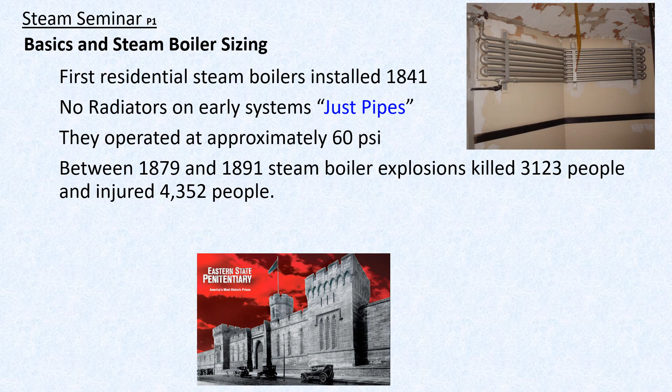They operated approximately 60 psi. Now today that's a lot different, but back then the steam pressure was running about 60 psi, which is dangerous, as we all know. Between 1879 and 1891, steam boiler explosions killed 3,123 people and injured 4,352 people. So combine these together, in that time period, there were 7,475 people injured or killed that was actually reported. There was probably some that weren't reported.

In 1880, they adopted the 2 psi rule residentially, which still stands today on residential applications. You use 2 psi back then or you don't get paid. So they were pretty straightforward with this whole idea of going to 2 psi and saving lives.

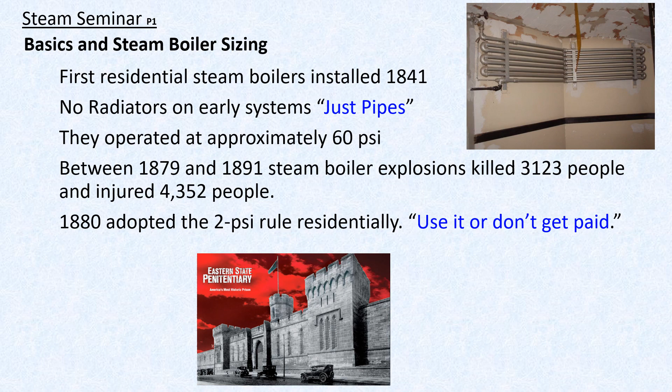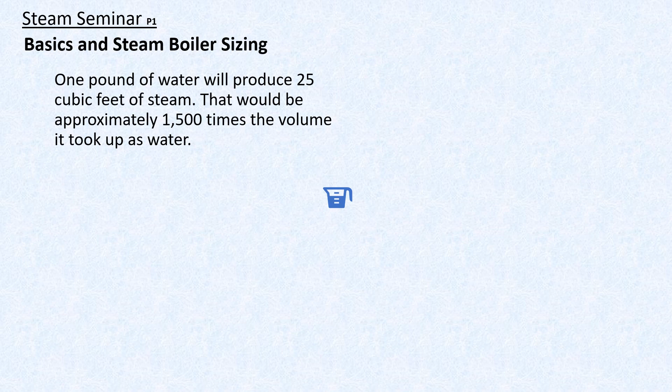So if we look at steam itself, it's being produced in the boiler, and 1 pound of water will produce 25 cubic feet of steam. So that's approximately 1,500 times as it expands out into steam into a vapor. So let's assume that we have 1 cup of water. We would actually end up with about 1,500 cups of steam. So it doesn't take a lot of water in the boiler to heat a building with steam. And steam actually, you'll see, moves very rapidly.

Talk about steam pressure. Residentially, you don't require a lot of steam pressure. Some companies operate in ounces of pressure, some operate in pounds of pressure. Almost any, and I say almost because there's a lot of variations of steam systems, but the majority of the steam systems, we could operate in ounces and it would still work good. I always say the best steam system is one that never builds pressure, but it'll still heat the building. The biggest enemy of steam pressures and steam systems is the pressure itself. The higher we raise that pressure, the more problems we're going to encounter. And we'll take a look at those a little bit later in the seminar.

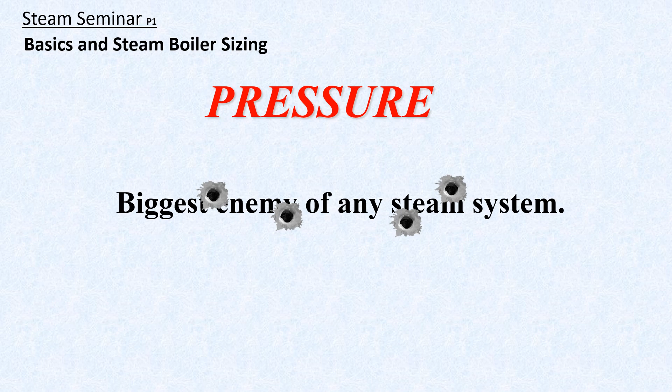I can't talk about heating a building with steam heat without talking about latent heat. That's the heat required to convert a liquid to a vapor. It's not going to change the temperature. We're going to take 212 degree water and produce 212 degree steam. We have to add another 970 BTUs per pound of water to accomplish this, making that transaction from liquid to vapor. This sounds like it could be pretty expensive because that's 5 times the energy it took to change water from 32 degrees to 212 degrees.

So let's recap that. If we have 32 degree water, not ice, but just 32 degree water, and we're going to convert it to 212, all those BTUs it takes to raise that water temperature from 32 to 212, it's 5 times that much to convert it to a vapor. Now, we're not raising the water temperature from 32 to 212 in the system, so it's a little misleading there. That's just a comparison. We're taking that water at room temperature on the first cycle or two and raising it to 212. But then as the boiler cycles off, that water coming back is about 180. So then we're going to convert it from that point to 212. So we're changing that 5 times number.

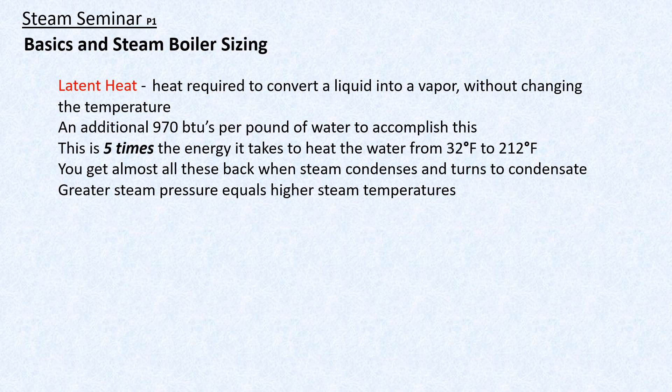Once we hit that 212 water, we're converting it by adding the 970, but then the 970 is coming back out in the system, so we're not really losing a lot at that point. Greater steam pressure equals higher steam temperatures to a point, but you'd have to add a lot of pressure to make a difference. We're not changing the latent heat part, we're only changing the amount of pressure in the system. We're compressing the steam more to raise the pressure. Steam's not heating the radiation, the latent heat is. So adding all this steam pressure doesn't do anything more than cost a whole lot of money.

The rate of steam pressure change is exponential. If you're creating steam at 1 pound of pressure and then change it to 2 pounds, that's an exponential growth compared to going from 0 to 1 pound. And if you go from 2 pounds to 3 pounds, that's another exponential growth. It's not an equal growth just going pound to pound to pound. Many steam systems have way too much steam pressure on them, and that could be 3 or 4 pounds of system pressure. We should really think about heating at lower pressures, maybe even ounces of pressure instead of pounds. That would be beneficial.

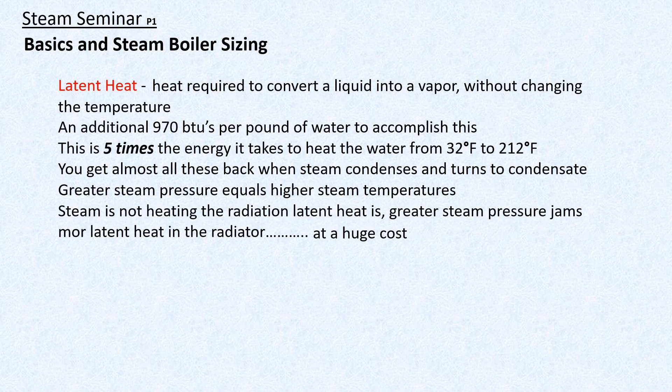Latent heat is what heats the building.

Let's talk about air removal. We have to get the air out of the system to allow steam to rise, and probably one of the more overlooked items on a steam system are the vents. I've seen many one-pipe steam systems where there's supposed to be a vent somewhere down the main line, and there's just a plug in it instead. The vent was removed, probably because it was leaking, and not replaced. That just starts running the fuel bills higher. We have to vent that air, get the steam to the end of the main as quickly as we can on a one-pipe system, and then start venting the radiation. So we want to move that steam out quickly from the boiler.

All steam systems need to vent air to move the steam faster. We can't just compress the air because it's not venting fast enough. That starts building pressure, and of course, pressure costs more money to operate at.

At zero pressure, steam moves through an insulated pipe at approximately 30 to 50 feet a second. We're saying zero pressure in the system yet, maybe a little bit in the boiler, but since it's an insulated main, it won't condense as rapidly once we get past the pickup factor of heating the pipe up. Then we move that steam quickly through the system. As we start building pressure, the steam slows down. At 5 psi, the steam would move through the pipe about 22 feet per second. That may seem odd, since at zero we're moving faster than at 5 psi, but remember, it's not an open-ended pipe—we have to compress the steam. So as we build more pressure and compress that steam, it takes longer. If it was just an open-ended pipe, it'd be hard to get to 5 psi, but it would move out the end pretty quick. This, though, is a closed system.

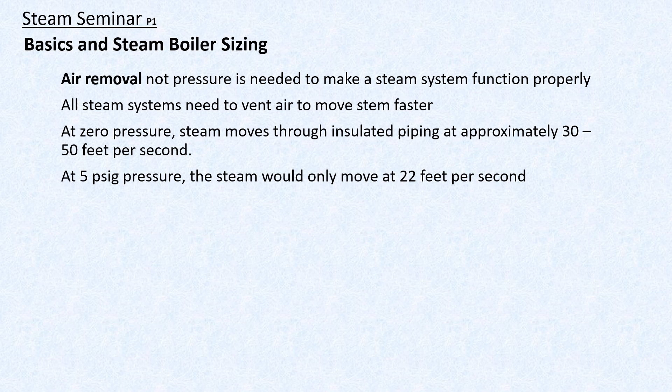Steam boilers are rated in terms of square feet of steam. It's called EDR, equivalent direct radiation—the original term for square feet of radiation.

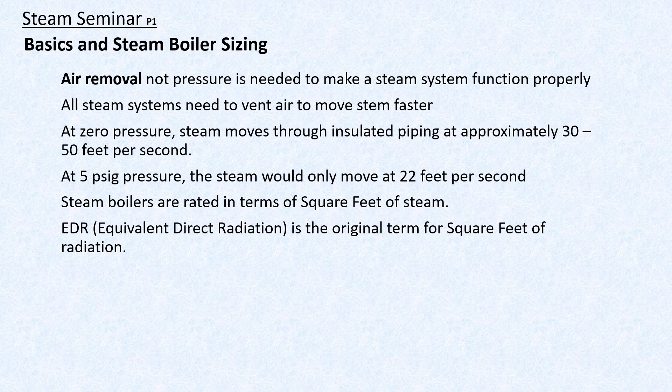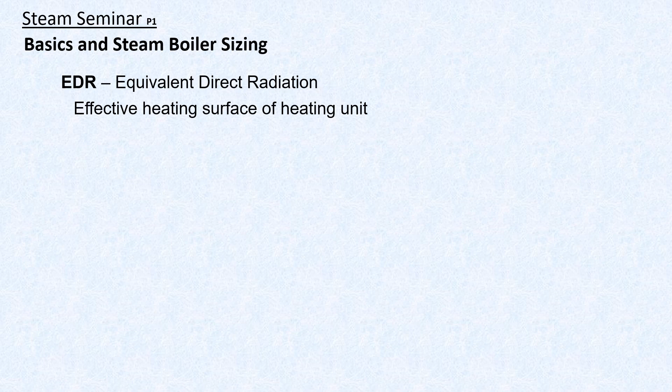Briefly mentioned EDR in the last slide, let's talk a little bit about that. That's the effective heating surface of a radiator. They go by square feet of radiation. Each square foot of radiation, or EDR, equals 240 BTUs at 1 psi.

So if you do get 1 psi, you will be getting 240 BTUs for every square foot of radiation in that structure. To convert EDR, square foot of radiation, to BTUs, you multiply that times 240. So the total number of square feet of radiation times 240 will give you the BTUs.

Now just the opposite: if you convert from BTUs to square feet of radiation, you take the BTUs and divide them by 240. That'll give you the total square foot EDR that boiler will put out.

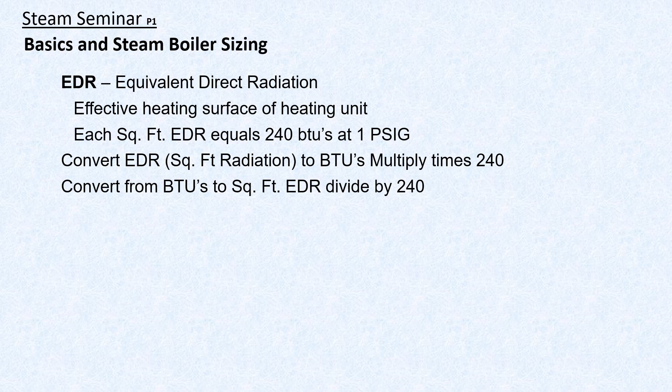High pressure goes to low pressure always. That's physics, you can't change that. Remember, the high pressure is in the boiler, and it's always going to be higher than what's in the system when the boiler is running. The longer the boiler runs and the pressure increases in the boiler, the pressure in the system will increase. It doesn't matter if it's ounces of pressure or pounds of pressure, but high pressure will always go to low pressure.

Things to consider when you're replacing a steam boiler, we're just going to highlight a couple of them here. Of course, all the steam boilers need to be resized and installed the proper size, which means you have to check the radiation count and see what's there, then size the boiler off the square feet of radiation required for the building.

Plan on replacing all the near boiler piping. It may or may not be right, but some things might have changed a little bit through time. But I would always consider repiping the near boiler piping to and from the supply pipes. It probably wouldn't be a bad idea to consider replacing maybe 10 feet of a wet return if it's there, because that last 10 feet before the boiler always seems to get fairly corroded up.

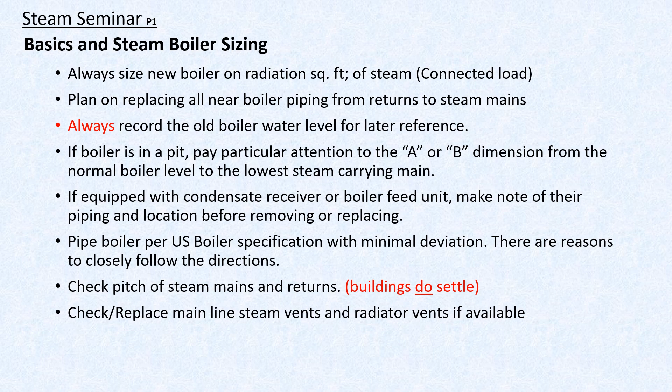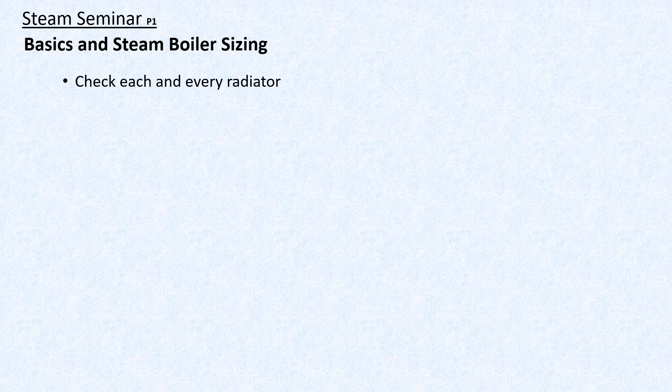So this is all kind of guidelines on replacing a new steam boiler. Let's talk about sizing the boiler. You have to check each and every radiator. What that means is you have to measure the radiator.

You got to measure the height. How tall does the radiator stand? It goes from the floor, which includes the legs - from the floor up, not from where the bottom of the radiator actually is, excluding legs. You got to go from the floor all the way to the top of the radiator. Now that'll give you your height.

The next thing you're looking for is the number of tubes or columns. Every radiator will have one or two pipes going into it. So from the pipe end, doesn't matter which end, you'll have one, two, or three columns or tubes in that radiator. So we're looking at one section - how many vertical tubes or columns are there? Then you would write that down.

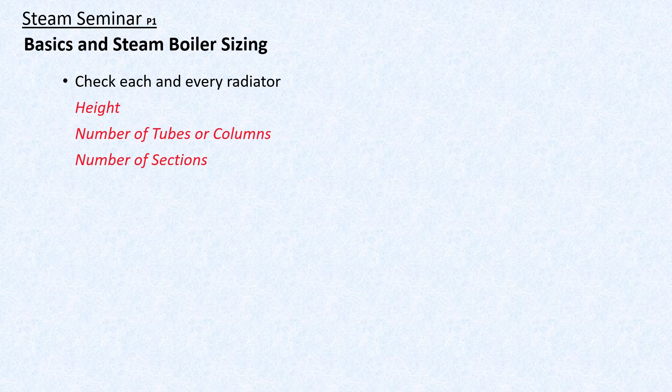And then the last thing is how many sections make up the length of the radiator. So we're going to go from all the way to the left to all the way to the right, looking face-on at the radiator - this gives you the total length. Some people like to measure the length, but the number of sections is more accurate. So if we have the height, the number of columns or tubes, and the number of sections, that's what you need to properly size a steam boiler.

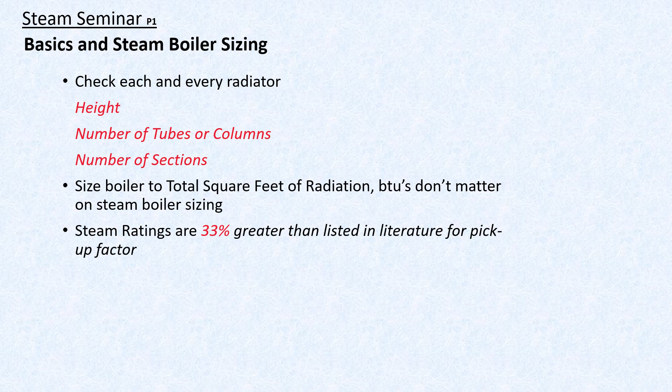Then when you convert all this to square feet of radiation, that's when you choose a boiler size. Again, BTUs don't really matter when it comes to steam. Steam ratings are 33% greater than what's listed in the literature - this is called a pickup factor. It takes so many BTUs to heat the piping, so they add extra radiation, or extra boiler BTUs, to heat up the piping. Once all the piping's hot, that converts over to usable BTUs for heating, or usable steam for heating. So there is a little bit of extra in there, and that's always good to remember.

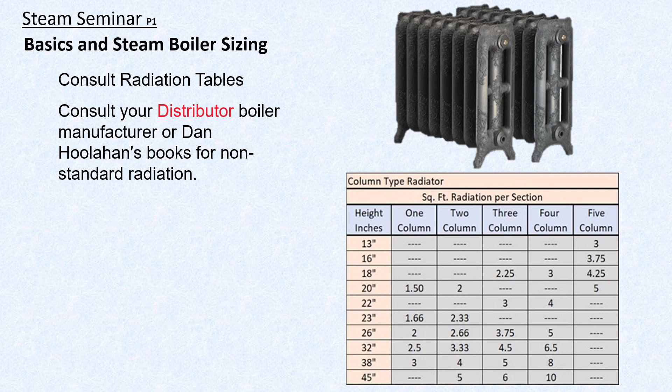So that's pretty easy to figure out. Let's look at an example.

This is a column type radiator again, same one. It's 32 inches high, 3 columns, so our multiplier would be 4.5, and that radiator is 19 sections long. So it's 4.5 times 19, which gives you 85.5 square feet of radiation.

That's one. Then you can go ahead and do all of them and just total them up, and then go to your color brochure and pick a boiler off the square foot of radiation.

Now here's a little tip that speeds things up. Let's say you have 5 radiators that are 32 inches tall. If the total number of sections for all 5 comes to 50, you would take 4.5 times 50. You don't have to do each one independently, although it's not bad to do that sometimes. But in most cases, I would just take all my radiators that are 32 inches tall, whatever they are, and count the number of sections, as long as they're the same type radiator, like a column type or tube type. So again, these are column type radiators.

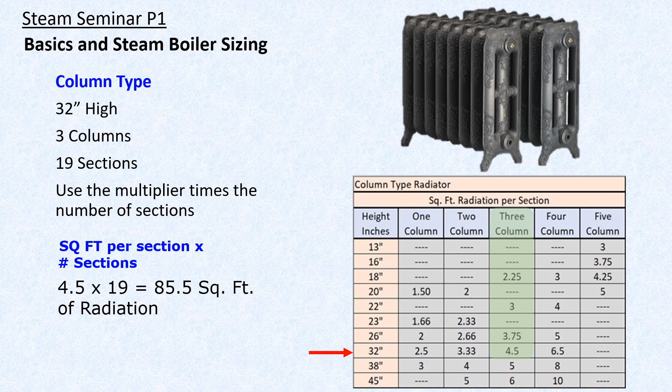Let's say we have a 3 column radiator with 10 sections, 32 inches tall. We're just going to walk through an example here if you're going to do each one. So it'd be 4.5 times 10 sections, since the chart told us 3 column, 32 inches was 4.5. 4.5 times 10 is 45 square feet.

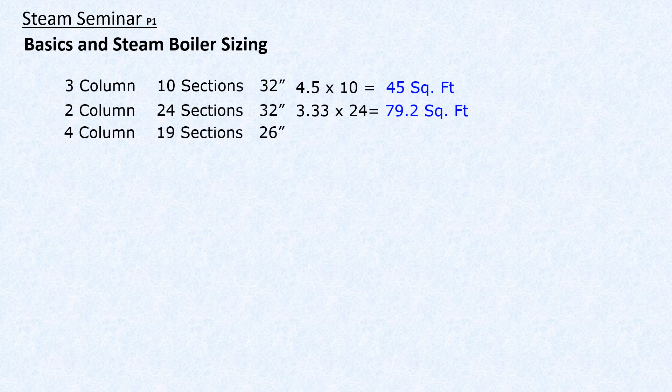The next radiator is only 2 columns, but it's 24 sections, 32 inches. Do the math, that comes out to 79.2. We'll follow that the whole way down. Let's say there's only 4 radiators in this house, kind of unusual, but it's just an example. So these 4 radiators come out to 339.2 total square feet of radiation.

So that's how we would size our boiler.

Now here's a little note. It says if mains are not insulated - that's the main around the basement where the radiation pipes come off and go up to the radiators - if that main pipe around the basement is not insulated, it becomes a radiator, and you have to measure that out and add it in. That's where some people fail, because they don't think of the piping, they just think of the radiation. The piping up to the radiators we don't really have to count, but the main pipe has to be insulated.

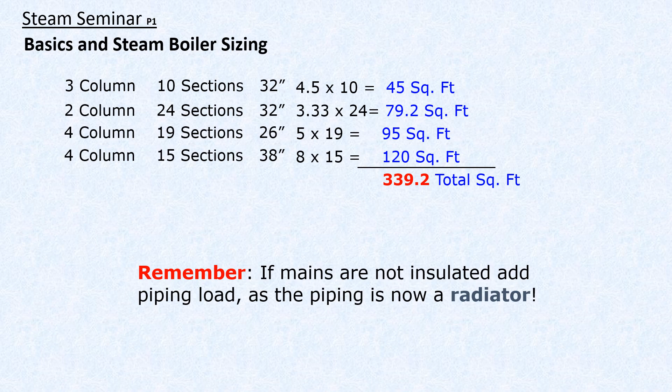And if not, it becomes a radiator. You got to count it and add it in.

Let's say we have a job here with non-insulated mains. Here's our criteria: we have 150 feet of 2-inch pipe, 40 feet of 1.5-inch pipe, and 30 feet of 1-inch pipe. This chart tells us what the BTUs are, so we're going to calculate this out. 150 feet will be 31,800 BTUs. Then we go to the 40 feet of 1.5-inch pipe and the 30 feet of 1-inch pipe, and we're going to have a total of 42,410 BTUs. That's our total length of non-insulated main.

Now we've got to convert that to square feet of radiation, so we do the math for that. 42,412 divided by 240 - that's the BTUs in square foot of radiation at 1 psi - comes out to 176 square feet of steam. Now we have to add that to our calculation, which we'll do in the next slide.

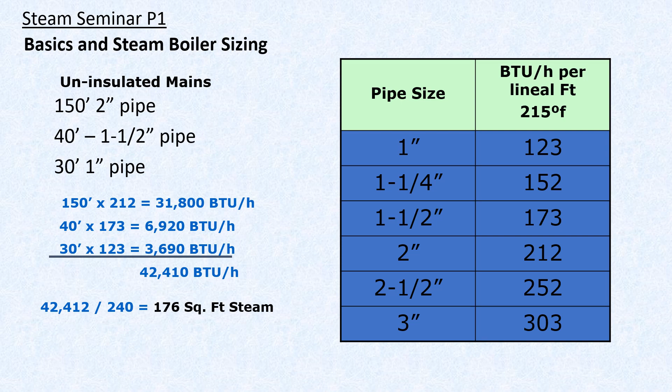So it takes us back to where we were. We add the 176 square feet, and now we have 515 square feet of steam.

Remember, if the mains are uninsulated, insulate them. Don't let it run without insulation on those mains - it runs the fuel bill up pretty high. Plus it changes the price of the install, because you're going to go from a boiler that's one size to a boiler that's a different size.

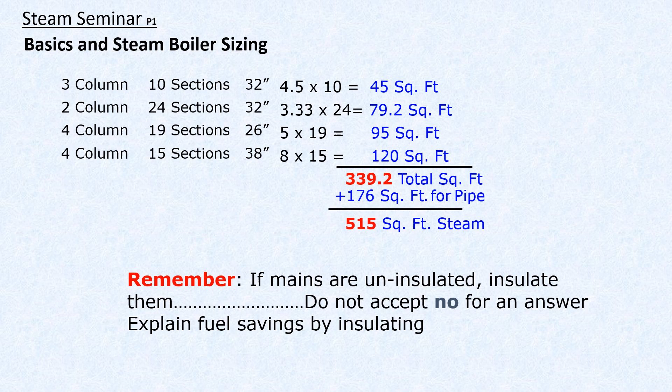And I say on here, don't accept no for an answer. Explain the fuel savings to the homeowner, let them insulate them if they want. Maybe you can supply the insulation, but a lot of contractors don't want to insulate the pipes, though many homeowners would, to get a smaller boiler and save on extra fuel. So give them the option, but it really needs to be insulated - otherwise the fuel bills are just way too high.

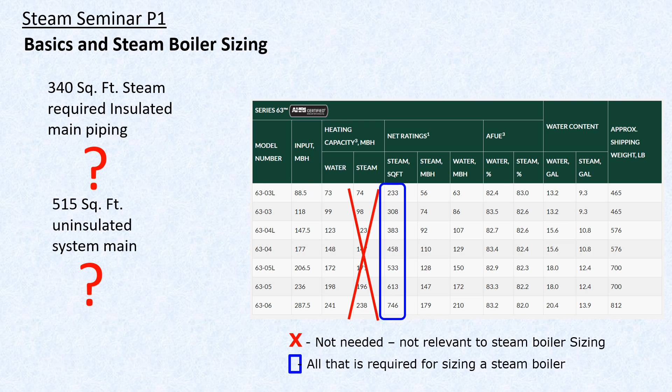So 2 points we're going to bring up, and then we're done. An undersized boiler does not fill all the piping and the radiation with steam. It's going to go to the radiators that have the lowest pressure drop, and that doesn't mean they're the closest to the boiler. That could be a larger pipe, a larger radiator somewhere, or they don't heat from the boiler out. It depends on the amount of resistance the steam encounters as it goes to certain radiation - it's always the path of least resistance first.

And it may work on milder days. They put it in, you turn it on in the fall, and it works. But when it starts getting colder out, at some point it's not going to heat the house. Excessive fuel bills - the boiler is going to run nonstop when it gets cold, and you're still not going to have enough heat. I want my boiler to run a long time, but I don't want a cast iron boiler to run all the time and not produce heat. That's the key - it has to produce enough heat to heat the structure. It should cycle off occasionally, especially a cast iron boiler, but we don't want it running all the time and not heating the building.

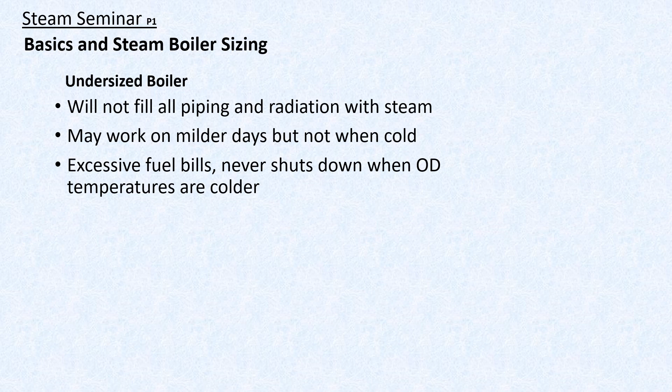Next point we're going to bring up is oversized boilers. Oversized boilers are going to have erratic operation. They're going to short cycle too much, creating steam way too fast. As you increase the velocity of the steam because of the size of the pipes, it's going to condense faster, causing a lot of issues, and you're going to short cycle the boiler. The shorter the cycle on that boiler or burner, the more it's going to drop the efficiency. And on an oil boiler, it could cause some light sooting, which acts like an insulator, so you don't want soot in your product.

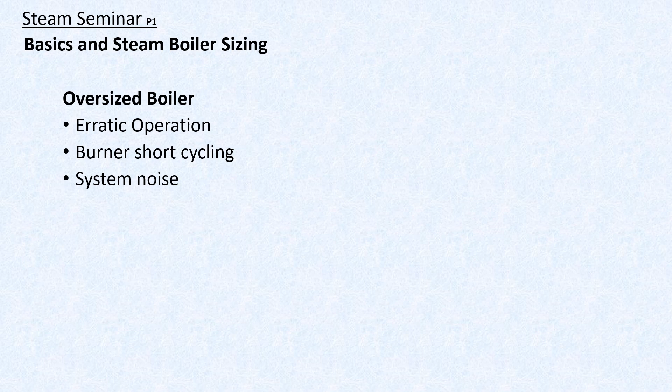It could be a noisy system. You could get some water hammer due to a lot of condensate from short cycling. You could end up with water leaking out of some of the vents because it can't get back to the boiler fast enough since we're making too much. And of course, increased fuel consumption - anytime you oversize a boiler, whether hot water or steam, you're going to raise your fuel bill. It can also produce higher maintenance or repair costs, so it's going to cost you more money over the life cycle of that boiler, not only in fuel but in maintenance and service.